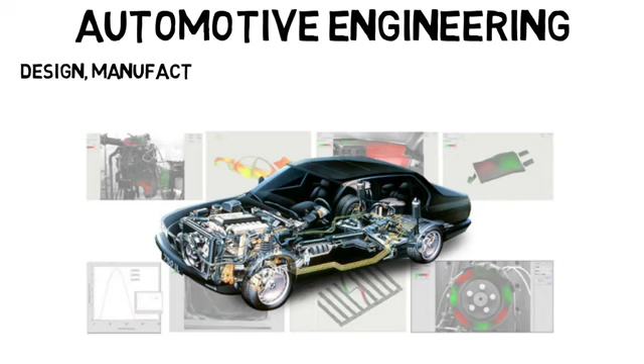Automotive engineering is about the design, manufacturing, and operation of cars, motorcycles, trucks, and other automobiles. There are a lot of subdisciplines within automotive engineering, and there are many things you can work on when it comes to an automobile.

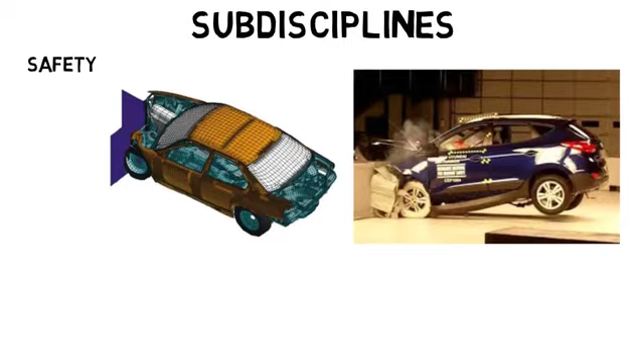For example, you could work on the safety aspect in assessing various crash scenarios, whether it be on the computer to doing actual crash testing. Cars need to meet certain standards to protect the driver and passengers. The frame of the car would have to be designed properly such that energy from a crash is absorbed or moved away from the driver.

Like I said in a previous video, cars are meant to crumple in an accident as engineers design them like that to save lives of the people inside. If the car was extremely strong and no damage was done to it, all that energy would be transferred to the people inside. There's performance in analyzing how fast the car can accelerate, how quickly it can come to a complete stop.

There's vehicle dynamics and looking at things like braking, handling, and steering and how the vehicle will respond. The engineer who works on this would have to analyze or design the braking, the tires and wheels, suspension, they could work on the frame as well, and more.

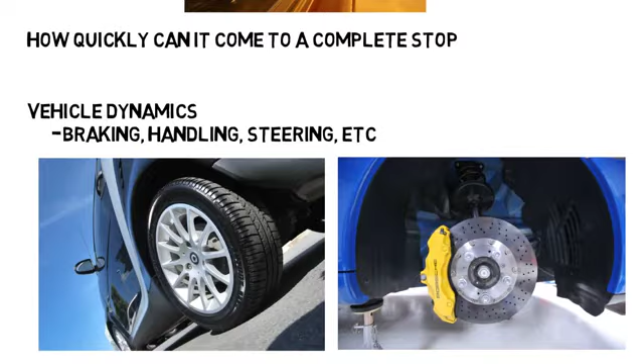There's the fuel economy where you look at fuel efficiency in miles per gallon and test car emissions such as hydrocarbons, carbon monoxide, carbon dioxide, and so on. But of course this wouldn't be the case for electric vehicles.

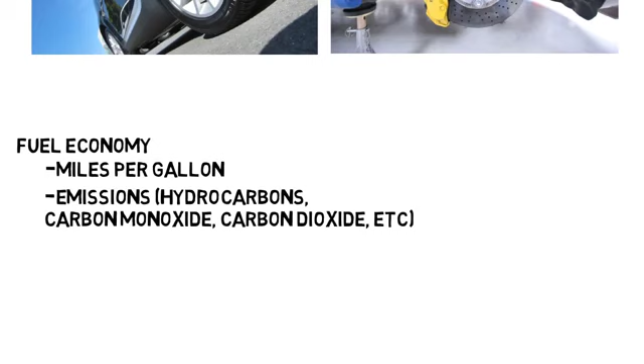There's the shift quality where you focus more on the transmission, the durability of the car, electronics, and much more. Overall, just note that there are many components to a vehicle. Common jobs would be like designing on the computer, testing, and actually working with a physical vehicle, or even manufacturing where you help with the making of the vehicle and its components.

Now when it comes to college, automotive engineering is rarely offered as a major, at least for undergrad. The most common major to go into is mechanical engineering, and then you would pursue careers in the automotive industry, or you'd get your master's and even PhD in automotive engineering.

But that's not the only option if you want to work on cars. Materials engineers can work on cars, electrical engineers can work on cars, especially with electric cars becoming a thing. Computer scientists are even needed for self-driving cars to write the programs for the autopilot as an example. And there's even mechatronics, which may be its own major depending on your school, or it's just a subfield of mechanical engineering, but this can lead you to working on the car control systems and similar aspects.

And these are just to name a few. So you can work on cars through various majors, but mechanical is just the most common one people think of, and it also depends on which aspect of the vehicle you want to work on.

Now a huge area of research you probably all know of is self-driving cars. Companies like Tesla, Uber, Google, Toyota, Ford, General Motors, and more are all aiming to get self-driving cars out on the road. Now we do have self-driving cars right now, but there are restrictions to them, and at the moment we are still waiting for a fully autonomous vehicle that's available to consumers.

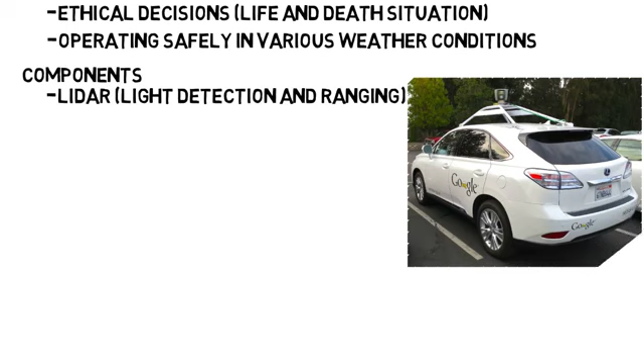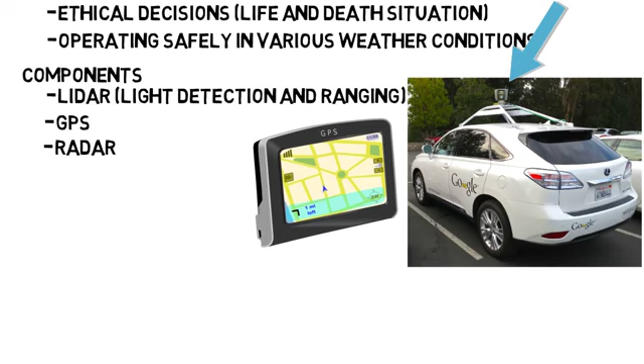There's the GPS, which the car uses to navigate to its destination and so that it knows where you are. There's the radar system, which is also used to map out the surroundings, but using lower frequency waves than light, or what the LiDAR uses. And this has its advantages. As one example, LiDAR will not work with heavy fog, whereas radar will.

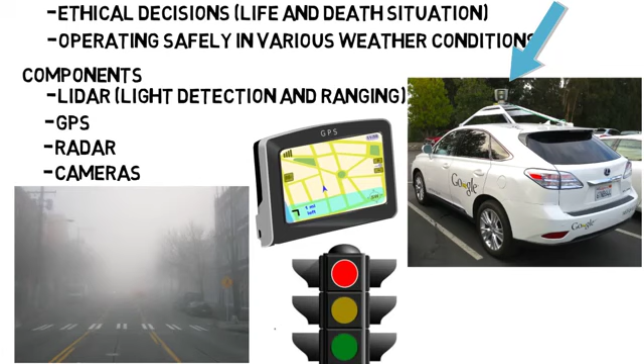And then there's cameras, which read the road and the surroundings as well, but they can also read traffic lights. And research is going into putting these together with even more components to make a safe self-driving car. But even though self-driving cars seem to be the main thing happening, other aspects of cars are also trying to be optimized.

Take the new Audi A8 suspension. This new suspension system incorporates an electric motor for each individual wheel. There's a camera on the front that reads the road and detects bumps so that the air suspension can coincide with those bumps, and with those precise reactions, you can nearly eliminate vibrations. Working with the camera and transmission of data could be worked on by an electrical or maybe computer engineer, but the suspension system itself and doing tests on vibration would be something a mechanical engineer would do.

There's research going on materials that aim to make lighter but safer cars, and this may involve looking at different types of metals that have different properties like varying strength and density. A lot of the metals in cars today did not exist just 15 years ago, and we are still continuing to make advancements in this area.

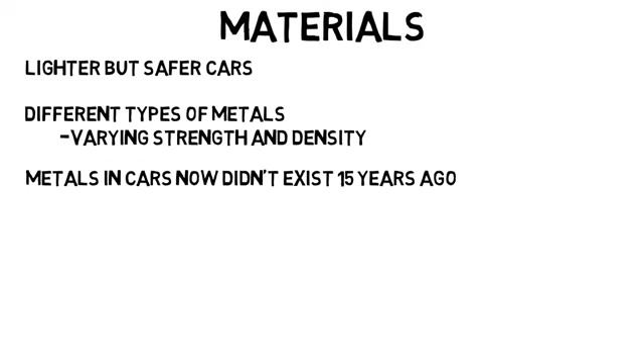Now, just to show again how much there is to work on, I found a Forbes article that I linked below titled, 'What Will Mechanical Engineers Do After Most Cars Go Electric?' Which is a fair question because electric cars don't have an internal combustion engine, and so are the mechanical engineers needed? Well, of course they are.

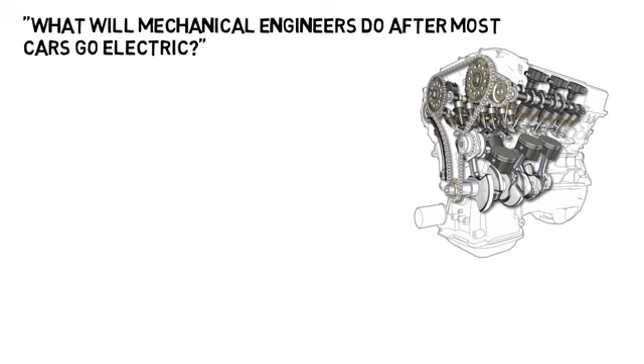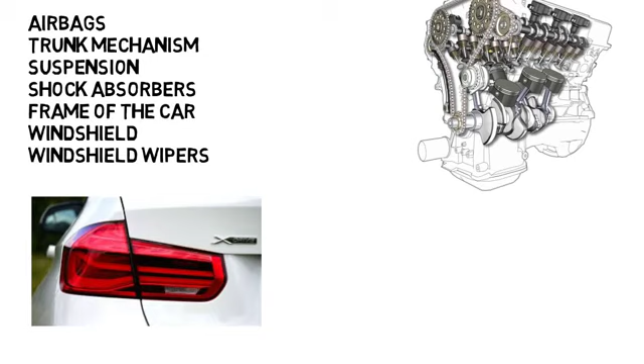Even though mechanical engineers do work on engines, most of them work on other stuff. Think about what a car really has. The airbag, the trunk mechanism, the suspension, shock absorbers, the frame of the car, the windshield, and even the windshield wipers. Everything that a car has, someone, and usually multiple people, have to work on, design, test, and manufacture. The article even really shows you the detail when they say how even the plastic taillight cover had to be made accurately and economically so that it could fit the car. And another engineer even had to design the machine that makes that taillight. There's so much more detail than you may think about all the things that we use. So yes, mechanical engineers are of course still needed.

Now when it comes to companies you want to work at, you may think of some of the typical ones like Honda, Toyota, Ford, Tesla, and so on. But there are also suppliers for these companies, and I saw multiple articles state that you might even do more of the cool design work at those places that you probably haven't heard of. For example, take Honda as an example. Huge company that I'm sure everyone watching knows of. But do you think every single part of a Honda is made by them at their plants? Because they actually are not. Many other companies help with certain parts, and I'm sure most people haven't heard of the majority of these companies.

According to Investopedia, AGC Automotive supplies Honda's windshields, Takata supplies their airbags, Borg-Warner supplies the automatic transmission systems, Automatic Spring Products supplies the seat components, and there are more. So even if you don't land the job at Honda or Toyota, just realize how many more companies there are that you can work at.

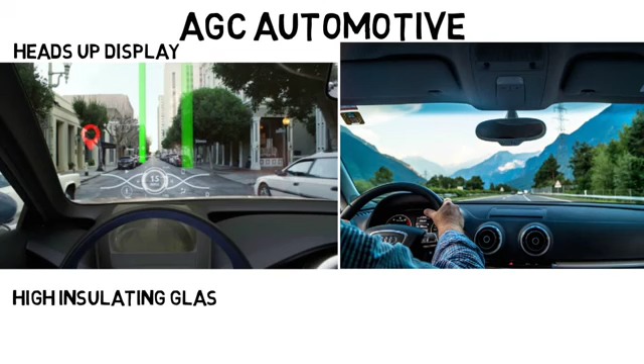Now something like windshields may not sound very exciting, but if you go to AGC Automotive's website, the company that supplies Honda's windshields, and look at their products, you'll see a lot of things. Things like heads-up displays on windshields, which basically display dashboard information on the windshield so drivers can stay focused on the road. There's high insulating glass for heat transfer optimization to maximize comfort. They're trying to make lighter windshields to help improve the car's MPG by reducing weight. And they're even working on glass where with the press of a button, you can control how much light and heat comes in, which helps reduce the need for AC.

So when people say they want to work on cars, just realize there's way more to it than you may think. You may help design the overall concept of a new vehicle, but you might help design the windshields, the suspension, the frame of the car, and various other specific aspects of these vehicles.

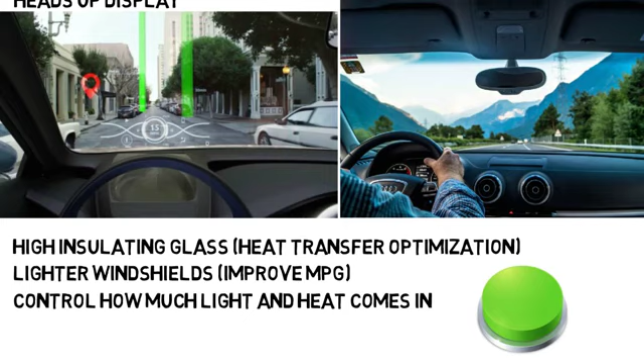So I hope this gave you a general summary of what automotive engineering is and what you can expect in the field.